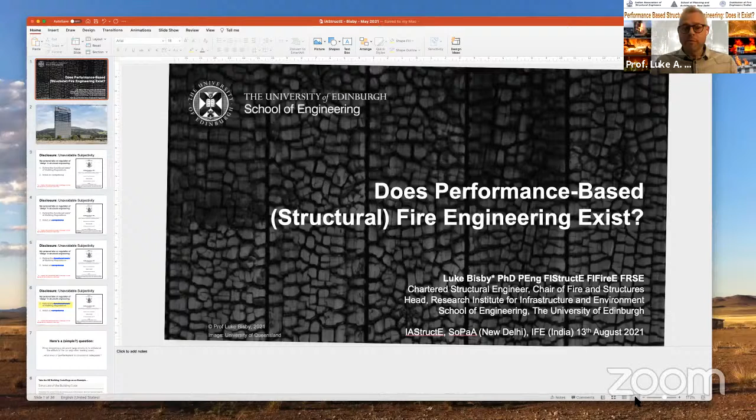As was mentioned, I must apologize, I have a bit of a cold, so if my voice gives up at any point, I apologize, I might cough a couple of times. Hopefully it's not COVID, I've been double vaccinated, so I should be okay.

The title of the presentation today is 'Does Performance-Based Structural Fire Engineering Exist?' I was very interested in the comments made a moment ago that in fire safety in India, performance-based fire engineering is not yet widely done, certainly in terms of the Indian codes. That's something that I didn't know, so that's an interesting piece of information for me.

I am aware, from having worked with some international consultancies who do structural fire engineering work, that there are specific projects in India where performance-based structural fire engineering has been done on some specific buildings. In the past I've done quite a bit of work with the large international multidisciplinary design firm Arup, and I also have a number of colleagues who work with a company called Buro Happold, both of whom are active in India and have been doing the type of thinking that I'll talk about today.

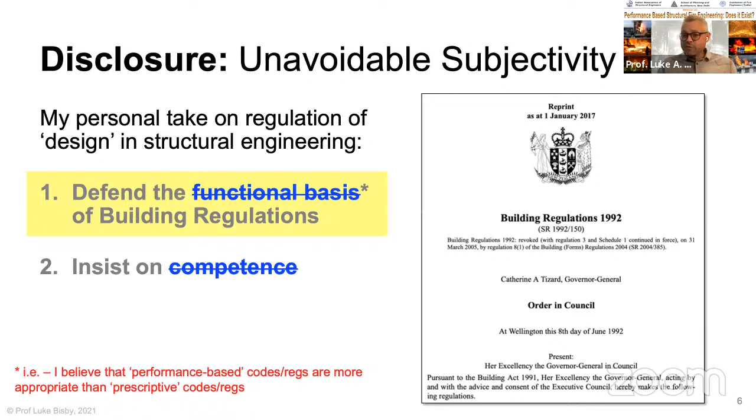I want to talk in this presentation about building regulations and what building regulations tell us about performance-based design when it comes to structures for fire. I'll take the New Zealand context as the context for this. So the simple question I'm asking is: if I'm designing a structure to withstand the effects of a fire, or any other loading case, what level of performance is considered adequate?

This question of adequacy is fundamental to performance-based design. If you're going to design something and show that it adequately meets the requirements of a functional objective in a performance-based building regulation, you have to decide what you mean by adequate, which means you have to decide what would be inadequate. When it comes to the performance of structures in fire, that's quite a challenging thing to do.

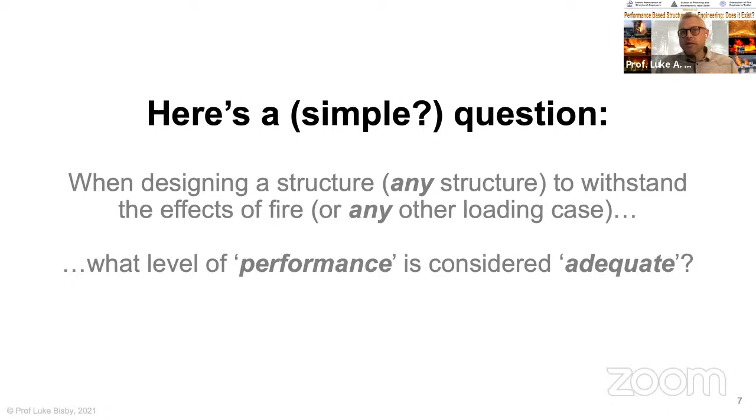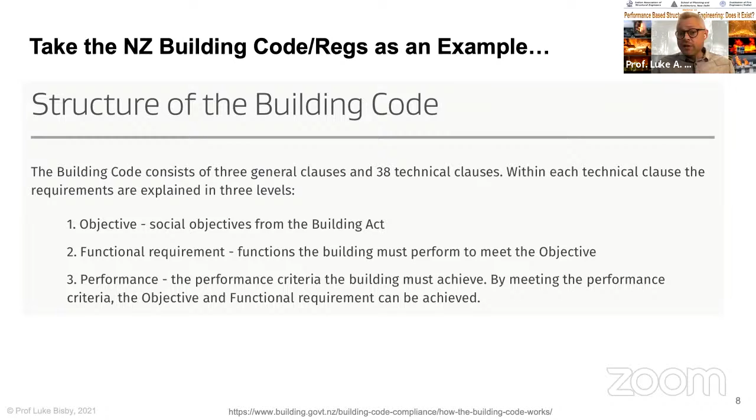If we take the New Zealand codes as an example, the building code has three levels of structure. It has an objective, which talks about the social objectives from the Building Act, and that is legislation enacted by Parliament. Then you have functional requirements, functions the building must perform in order to meet the societal objectives, also written in law. And then you have a number of performance standards that underpin the functional requirements and allow you to achieve those things. Those are given in guidance, not in law, but guidance that sits beneath the law.

If you think about the structure of the New Zealand building codes, the British codes are very similar, and the Canadian codes are much the same. You have the Building Act, an act of law from the New Zealand Parliament. The building code sits beneath that, which is also law. And underneath the building code, you have a number of different methods by which you can meet the functional requirements given in the building code. I'm going to talk about those various methods as I go through this talk.

So what do structural engineers designing buildings in New Zealand actually have to do when designing buildings to resist the effects of fire? Keep in mind that 18-story mass timber residential hotel building in Norway I mentioned a few minutes ago. If you go to the New Zealand codes and look at the law, what it says in the building regulations with respect to structural stability is that structural systems in buildings must be constructed so as to maintain structural stability during fire.

There is a question of what we mean by structural stability, so that there is a low probability of injury or illness to occupants, and a low probability of injury or illness to fire service personnel during rescue and firefighting operations. It's not enough that you just get everybody out of the building. You have to make sure the building remains stable during fire to the extent that fire and rescue personnel might be operating within the building. For an 18-story building, that could be a very long period of time.

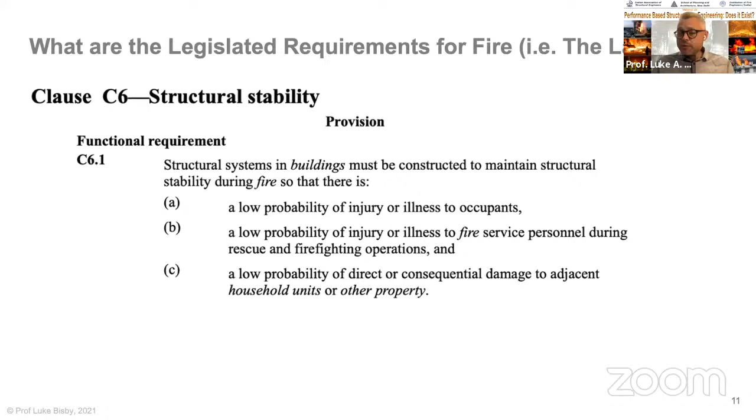So the performance metrics that underpin those requirements state that structural systems in buildings necessary for structural stability in fire, the structural frame of the building, must be designed and constructed so that it remains stable during fire and after fire when required to protect other property.

In doing that, you have to take into account the severity of the fire that you might get. You have to consider the fire dynamics likely in your structure, the presence of any automatic fire suppression systems like sprinkler systems and other active systems, and also the chances that those active systems, including sprinklers, might fail and impact structural stability.

It also says that structural systems necessary to provide firefighters with safe access must be designed and constructed so that they remain stable both during and after the fire, which implies that structures must be designed to resist what we call burnout in fire safety engineering - the burning of all the fuel without suppression or intervention, such that the fuel is gone, the fire goes out, and the structure is still standing.

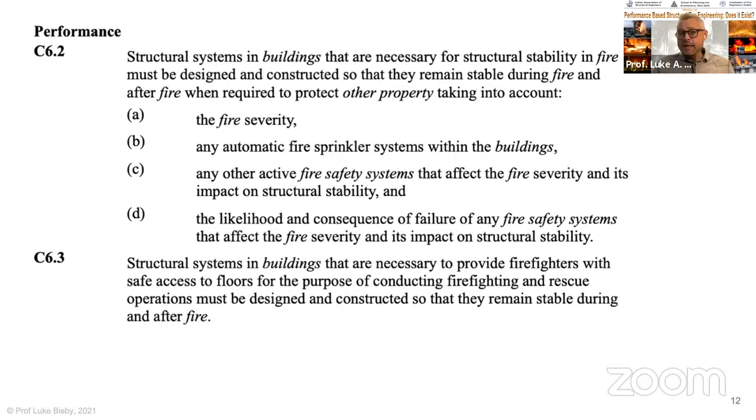There are also, however, legislated requirements specifically for the structure. So this is some of the legislative requirements: buildings, building elements, and site work shall withstand the combinations of loads they are likely to experience during construction or alteration and throughout their lives.

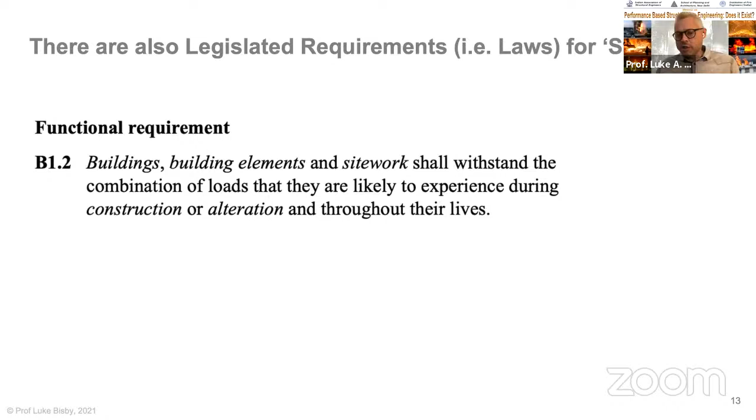In order to achieve that, structural engineers are required to make sure that buildings have a low probability of a number of bad behaviors - rupturing, becoming unstable, losing equilibrium, or collapsing throughout their lives. The New Zealand codes are very interesting in that they say there has to be a low probability of loss of amenity as well as loss of stability.

So you can't have your structure become unusable as a consequence of being impacted by one of a number of load cases. That's very unusual, incidentally - I've not seen that in other building codes around the world.

I think that in the New Zealand context, that is probably because of the high seismic zone that New Zealand exists within, and there have been past events where there have been earthquakes. For instance, the 2010-2011 Christchurch earthquake in New Zealand caused a great deal of damage to buildings, but did not result in an immense loss of life.

And there was a real public outcry after that earthquake that all of the buildings in Christchurch had been so badly damaged that the structural engineering community was considered not to have done its job properly and not to have prevented that damage from occurring.

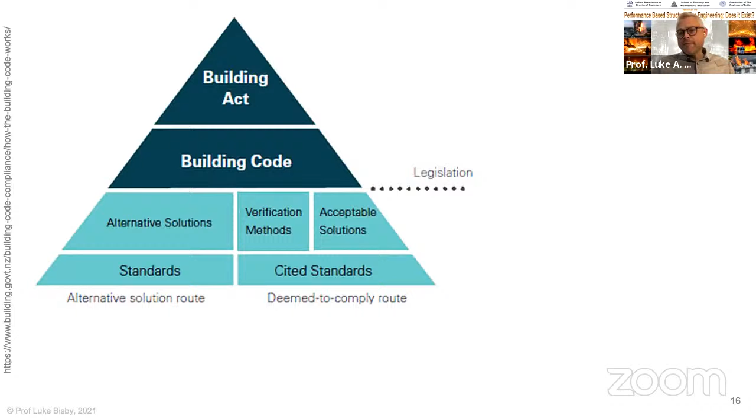Alternative solutions is really the full performance-based engineering route. I'll talk about all three of these now in sequence, just to give you a sense of where you might fit in if you're a structural engineer working in the Indian context.

In most jurisdictions in the world, the acceptable solutions route, or the equivalent, might be called the prescriptive route. What the structural engineer does is, let's take the 18-story timber building in Norway that I mentioned. That building is an 18-story timber building. Let's imagine that it's a residential building.

What you would do is go to the fire safety codes and find out what fire resistance period is required for an 18-story residential building. You would go to a table like this one, from the New Zealand code. In this table, I think the risk group that would apply to the 18-story timber building is the SM group.

You can see that if you have that building and you don't have fire sprinklers in it, you need to provide 60 minutes of fire resistance. Interestingly, in the New Zealand code, simply by adding sprinklers to your building, you can drop the required fire resistance period by half, and that's pretty standard in the New Zealand code.

I take issue with that personally, but I won't go into detail as to why at the moment. You can also see that the New Zealand code splits the requirements into protection of life and protection of property. For some types of buildings, particularly commercial and warehouse buildings, you have a much higher fire resistance requirement to protect property than to protect life. That intuitively makes sense.

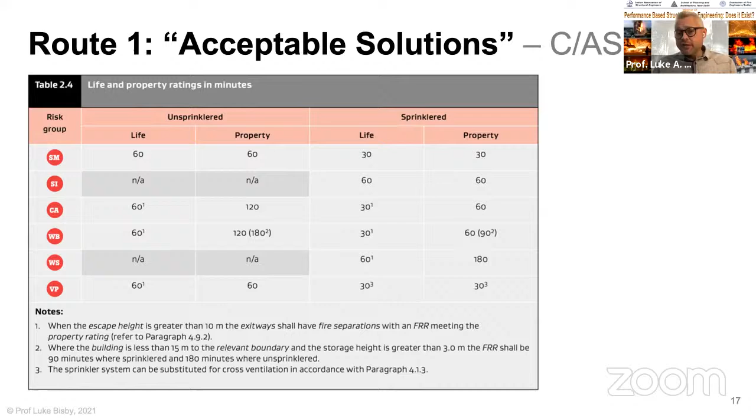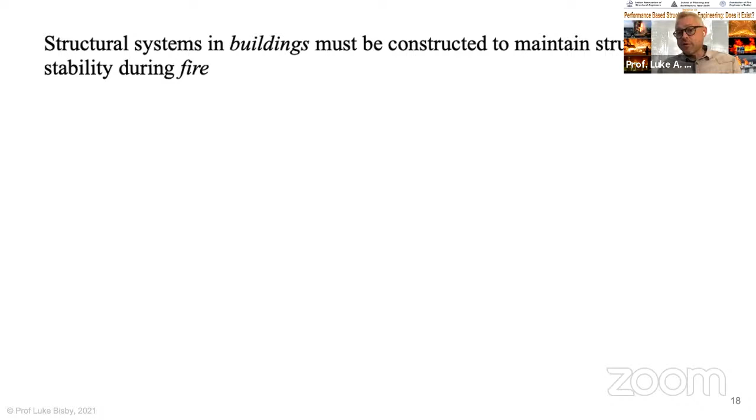But it's important to think, well, where does that fire resistance for my structure, contained for instance within a building code for reinforced concrete, where do those minimum member dimensions and concrete covers to the rebar that give you a certain level of fire resistance come from? The answer is they come from furnace testing.

Furnace testing gives us what we call fire resistance, the 60 minutes fire resistance or 90 minutes fire resistance, whatever you have from your table of required fire resistances. The way that we've historically developed these fire resistances that we use is through furnace testing.

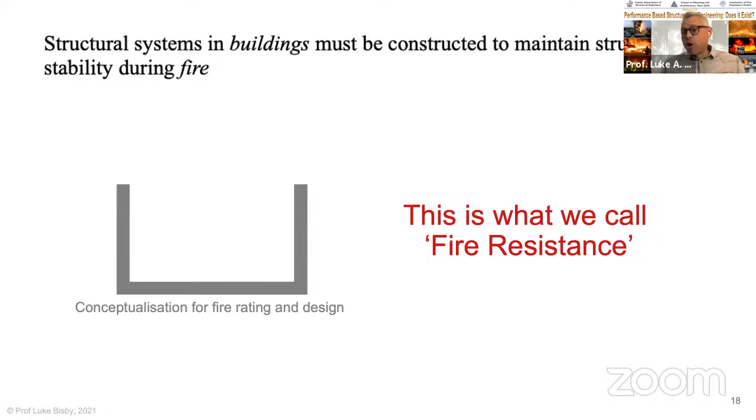In a furnace test, what you do, if you've never done one, is you take essentially a very well insulated box that's the size of a room. I've just conceptualized that here with a schematic. You take your structural element and you span it. Let's say I was assessing a floor system, and you span your element across the top of that box.

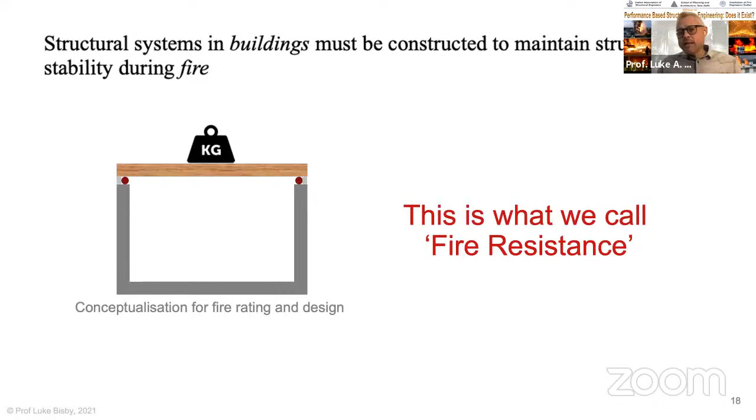You put some load on your structural element that is intended to represent the service load you would expect in your building, and you use large premixed propane, natural gas or oil flames to inject energy into the box to simulate a room fire. Then you wait for your structural element to become unstable, or you wait for it to fall down into the furnace.

And when it becomes unstable or falls down into the furnace, we say that the time at which that occurs is the fire resistance period. And of course, in doing that, we have to use a standard temperature time curve to simulate the building fire.

But it's really important to recognize where that standard fire resistance curve, the standard temperature time curve that we assess building elements against in order to derive their fire resistance, comes from. If you look back throughout history, what you find is that it comes from ad hoc tests done both in London and the Eastern United States around the turn of the 20th century, the late 1800s, early 1900s.

There were tests being done in an ad hoc way on flooring systems. The researchers at the time were trying to subject these flooring systems to the most severe possible heating they were able to achieve in a brick-lined box the size of a room. In doing those tests, they measured temperature time curves, and those eventually turned into the standard temperature time curve.

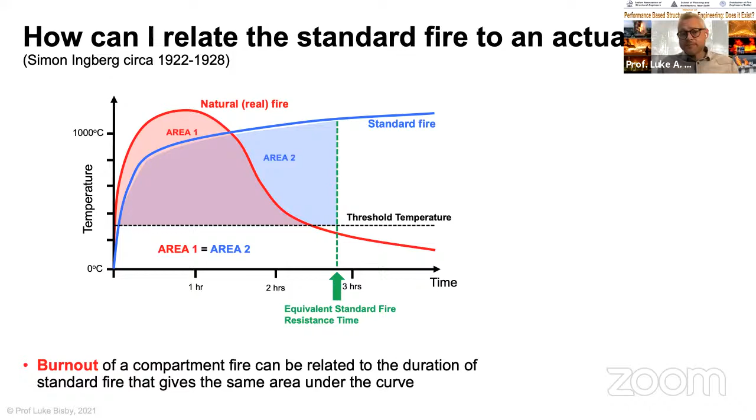So if that's the equivalence metric, Ingberg had to ask how much resistance to fire different types of structures need. What he did was set a bunch of fires in a bunch of different buildings with different amounts of fuel in the rooms. He measured the natural fires and made his equivalence comparison to the standard fire.

Fundamentally, the amount of fire resistance you require in a building is linked to the amount of fuel in your building, which is linked to the use and occupancy. So the more fuel you have, the longer fire resistance you require. And what that means is that fire resistance originally implied burnout without any intervention.

So that's kind of the history of where fire resistance comes from. I think it's really important that all structural engineers understand that, and understand the simplifications that have gone into it. In particular, if I go back a couple of slides, understand the schematization of fire resistance that we use.

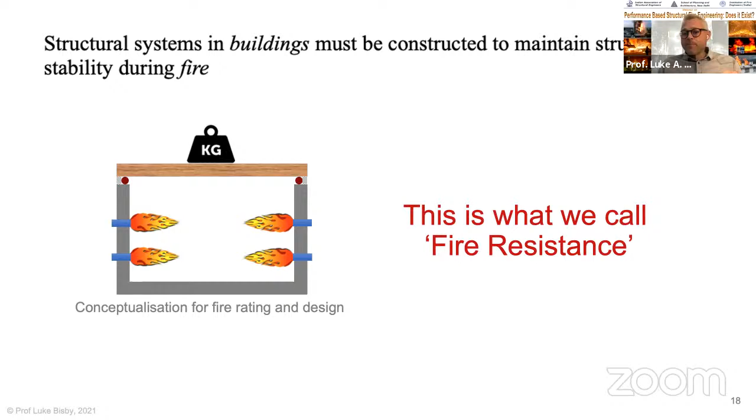An isolated element sitting on top of a furnace with a maximum span of about 3 to 3.5 meters is not at all representative of the performance of a structural element in a building, where you have continuity in 3 dimensions, restraint, both sagging and hogging bending in elements, and all sorts of interesting things going on in a real building that the fire resistance test cannot possibly characterize.

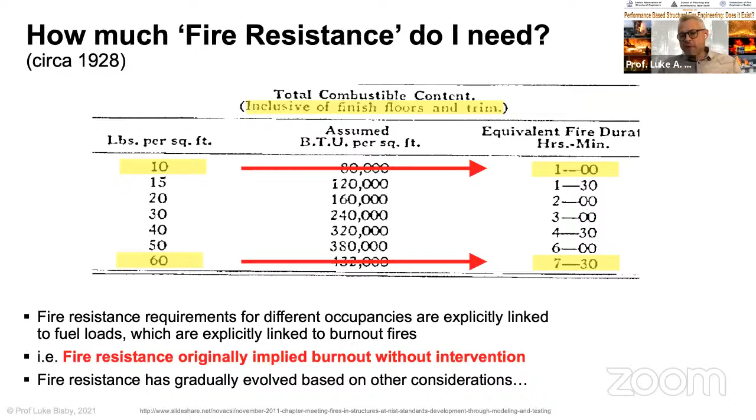You also have all sorts of really interesting fire dynamics effects in a real building that the equivalence metric Ingberg came up with in the 1920s can't possibly take account of. So fire resistance is an extremely approximate and extremely coarse way of dealing with fire resistance in structures.

So route 1, to basically pick a fire resistance value from a table and then provide that, relying essentially on results that have come out of furnace tests, is an extremely coarse and approximate way of dealing with it. And the links between fire resistance and real structural response in fire, I would say, are tenuous at best. Those links are actually not very good.

There's been a lot of work done over the last 20 years to show that real structural response in fire is very, very different than the response to fire of elements when tested in furnace tests. Furnace tests are not actually interrogating the things about structural elements that are most important, in particular, thermal expansion, thermal curvature, and the interactions between structural elements within three-dimensional structural frames. None of those things are interrogated by furnace tests.

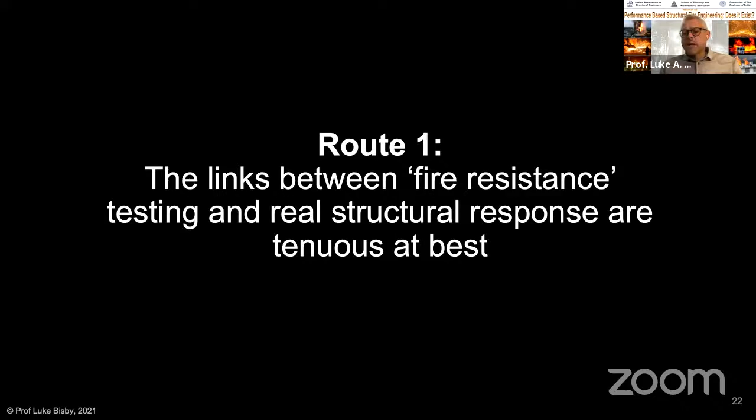So that's route one. Route one is following rules, and it's certainly not what performance-based engineering looks like. Route two in New Zealand is called the verification methods. Essentially, what the New Zealand codes allow you to do is to not use the standard fire in making your assessment. So rather than using the standard fire, you use a more clever assessment of the fire that you might get in a building.

So basically they're saying, well, we know a lot more about the physics of fire dynamics than we did in the 1920s when Simon Ingberg was coming up with this stuff. So we want you to use a physics-based idealization of compartment fire dynamics to figure out what the thermal loading of the structure is. So they say, if you do that, you're going to design your structure for what they call the full burnout design fire - the natural fire that I showed in the previous curve.

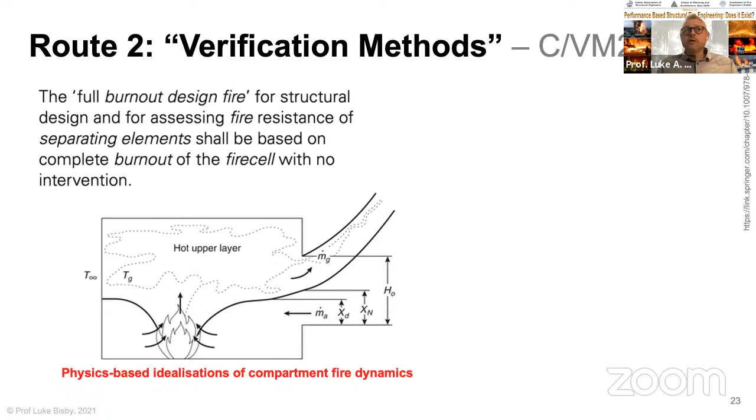So how do you do that? Well, they give you three options in the New Zealand code for doing this. Option A is to use a time equivalent formula to come up with this equivalent fire severity, and they give you some rules to do that. That's not very clever, it's just a bunch of additional rule following. So I would actually classify that as a prescriptive approach - a prescriptive approach that doesn't require you to provide a fire resistance period against the standard fire.

Option B is to use what's called a parametric temperature time curve. In particular, the structural Eurocodes used in Europe provide a means by which you can approximate the likely natural fire you would get in a compartment for a given geometry, building materials, fuel load, and ventilation openings. You can approximate what fire dynamics you're likely to get and use that as the design fire. So you follow rules to figure out what the fire is going to be, and then you have to impose that fire on your structure and assess the performance of your structure.

Now, the problem in the New Zealand code is that how you assess the performance of your structure, how you decide that the structural response to the parametric fire is adequate, is not defined at all. So as a structural engineer, you're kind of left scratching your head and not knowing what to do.

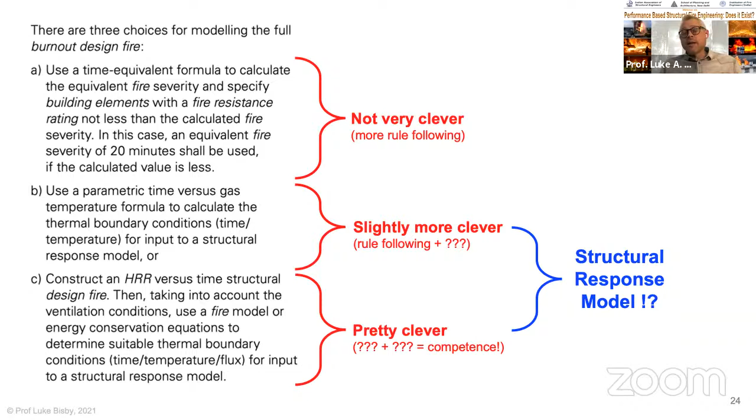And I've spoken with a number of colleagues who practice in this area in New Zealand, and everybody agrees that it's actually not done very well at all, and is effectively useless if you want to actually assess the structural response. So these types of analyses, it turns out, are not actually done, as far as I can tell. So route 2 basically helps you a little bit with the fire dynamics, but it doesn't help you at all with the structural engineering - how would you actually assess whether the structural response under a particular thermal scenario is adequate or not?

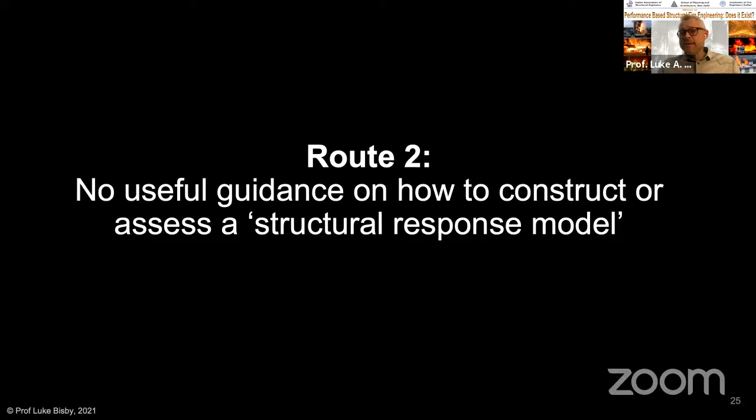Route 3, which is this, as I call it, this mysterious and wonderful beast, performance-based design, which may or may not actually exist in reality, is described in the New Zealand building codes as follows. It says it is a performance-based code and it allows for innovation and uniqueness in design. And I agree with that statement. It says that departures from the acceptable solutions and verification methods can result in the best outcome for a building project. And I agree, performance-based engineering can absolutely result in the best outcome. If you don't have to follow the specific rules, you have much more freedom as a designer, much more freedom to innovate.

And it also says that in the New Zealand context, you don't actually have to justify why you're not following either the acceptable solutions or the verification methods. So any designer in New Zealand is free to take a fully performance-based approach if they want to.

They then say, however, that the process of proposing an alternative solution or performance-based design, identifying the assessment methodology and the acceptance criteria, documenting the solution and navigating through the approvals process can be complex. I think that is quite an understatement. They say that to assist with this, they've developed a document called the Fire Engineering Brief Process, which tells you how to interact with all the various stakeholders who might be interested, so as to make sure everybody can agree what assessment methodology and acceptance criteria are going to be used in doing a performance-based design.

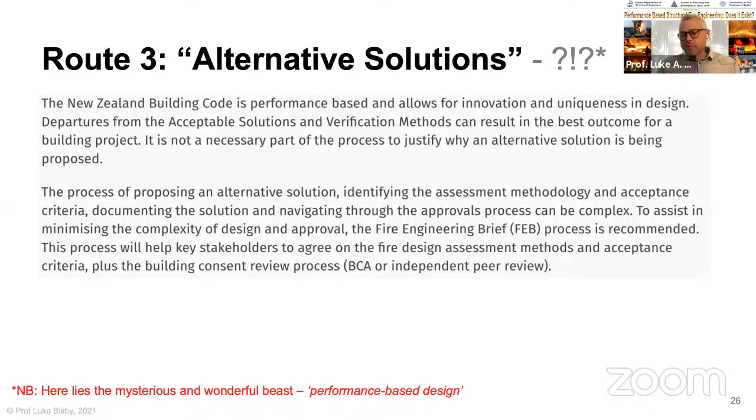And that's telling us something very interesting. When you do a performance-based design, there are no rules. So the only way to come to a solution is to work with all of the relevant stakeholders in order to come to some agreement about what represents adequacy with respect to the functional requirements of the building regulations.

Well, that doesn't help me as a structural engineer. What I need to know is what do I actually have to do as a designer? What are the steps that I need to take? What are the things that I need to show? So in New Zealand, there was a recognition that structural engineers didn't have any guidance.

So they developed Practice Advisory Note 18, about the fire safety design specifically for tall buildings. What it says is that structural systems in tall buildings need to be designed to remain stable for the complete duration of a fire, for burnout conditions and cooling back to ambient temperature, and to maintain safe access and egress for firefighters and building occupants. So that's similar to the functional requirement given in the Building Act and the building regulations.

It then goes on and says that useful guidance is provided by the Society of Fire Protection Engineers, the National Institute of Standards and Technology in the US, and the Steel Construction Institute in the UK. Now, I've consulted the documents referenced in the New Zealand guidance, and none of those three documents help at all, frankly, with what would be considered useful assessment criteria in order to decide the adequacy of a particular building design.

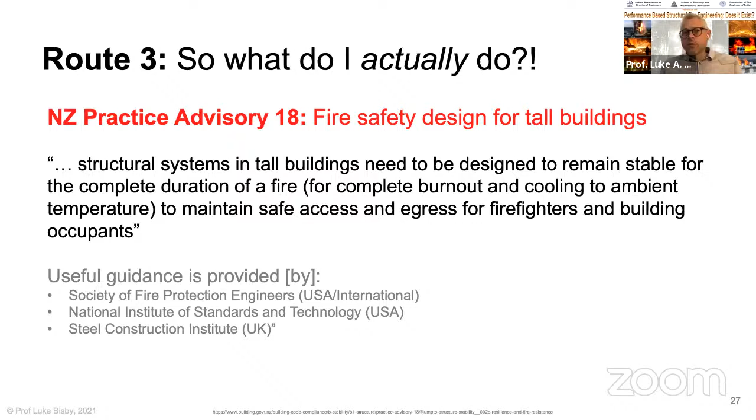But what's interesting is if you read the report on the fire engineering strategy for this building, you find that some of those beams in that floor plate deflect more than a meter vertically in a fire. And something like 700 or 800 millimeters of that is irrecoverable after a fire. So the permanent deformation of the floor plate in the Shard after a severe building fire is on the order of half a meter or more.

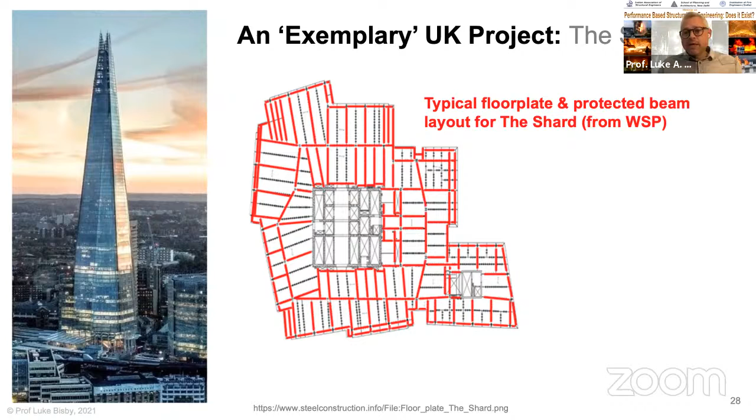But of course, these decisions need to be taken by the structural engineers, and they illustrate this point about what would be considered adequate with respect to the performance of the Shard if you did actually have a fire. If you think about that in the context of what the New Zealand building regulations require, you have to show that there's a low probability of losing equilibrium or the building becoming unstable. And that's fine - that's what was shown by the analysis that WSP did for the Shard.

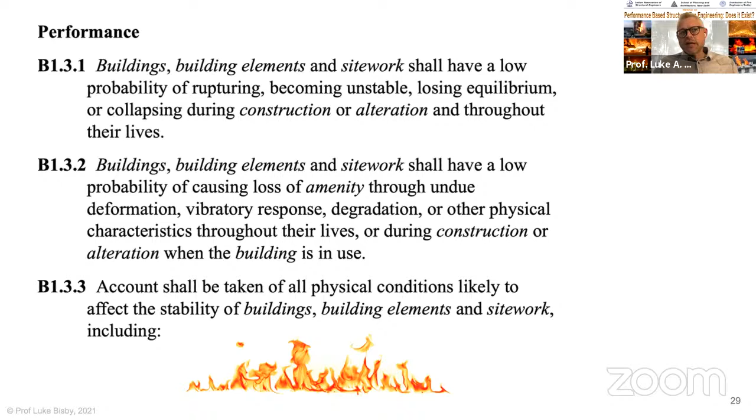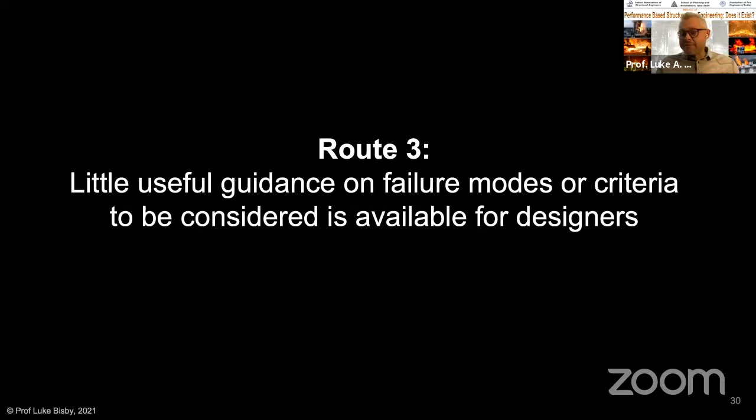But if you also had to show that there was a low probability of loss of amenity, I think you'd struggle to say that what was observed in those analyses was adequate. These are the kinds of questions structural engineers need to ask themselves when they embark on these types of designs. So route 3 in the New Zealand context, the full alternative solution, the full performance-based design route, has a real problem because it doesn't provide any guidance on what might be considered adequate with respect to meeting the requirements of the functional building regulations. It doesn't tell you what probability is low enough to be considered adequate.

And so at the end of the day, what these performance-based codes in New Zealand, or indeed all performance-based codes around the world, are saying is best summarized in a paper written by this chap here, Ruben Van Coile, who I've worked with for a number of years. I'm a co-author on this paper, but Ruben Van Coile is the brains behind the operation. A few years ago, only 2 years ago actually, we published a paper called 'The Need for Hierarchies of Acceptance Criteria for Probabilistic Risk Assessments in Fire Engineering.'

We were basically asking ourselves, how do we decide what is adequate when doing a performance-based design for fire? The conclusion we came to was that the only way we could define adequacy was that an objective, diligent, and competent fire safety professional would consider the spectrum of possible consequences and their associated probabilities for any given design to be acceptable to normal societal stakeholders. That's actually a pretty big statement with a lot of subjectivity in it, and it demands an extremely high level of competence and professionalism from fire safety engineers.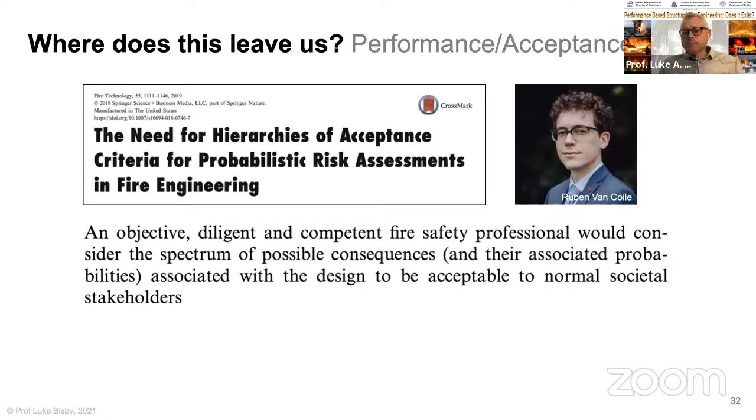So at the end of the day, performance-based design codes are saying, with respect to adequacy, if you ask a performance-based design code what do you mean by adequate, what do you mean by a sufficiently low probability, the answer is, we don't know. The codes don't know. The codes believe that you, and by you we mean all of the stakeholders, have to get together as a group and decide together what is adequate. In doing so, as a society, we have to hope that all the people involved in that process are objective, diligent, professional, and competent.

So if you want to consider moving down a performance-based route, my view is that you have to make absolutely certain that within the process of permitting performance-based design, those people charged with designing, assessing, or approving performance-based designs are objective, diligent, and competent. You have to have mechanisms in place that require those things to exist, because if you don't, I don't think those things will exist.

Going back to one of the slides I had at the beginning, I very strongly support the idea of functional building regulations or performance-based design. But if you're going to do it, you must insist on competence, and you must have mechanisms in place that require that competence to exist within the processes. So hopefully that's given you some of my thoughts about this particular topic, and I look forward to some discussion now with anyone on the call. Thank you.